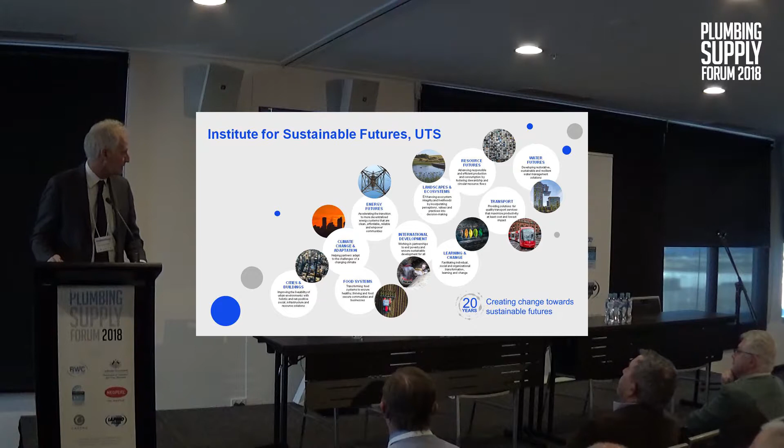Some of those places shown here are jurisdictions we've worked in, obviously in Australia, particularly during the Millennium Drought. We were extremely busy with a whole range of different water efficiency programs, working for government regulators, utilities, and the private sector. But in terms of the presentation, I wanted to just talk first about what is the goal in terms of sustainability.

What are we chasing? How do we know whether we've succeeded in what we're trying to do? Of course, our mission to create change towards sustainable futures is deliberately a direction, not something you can ever reach. It's a nudge, trying to move things in that particular way.

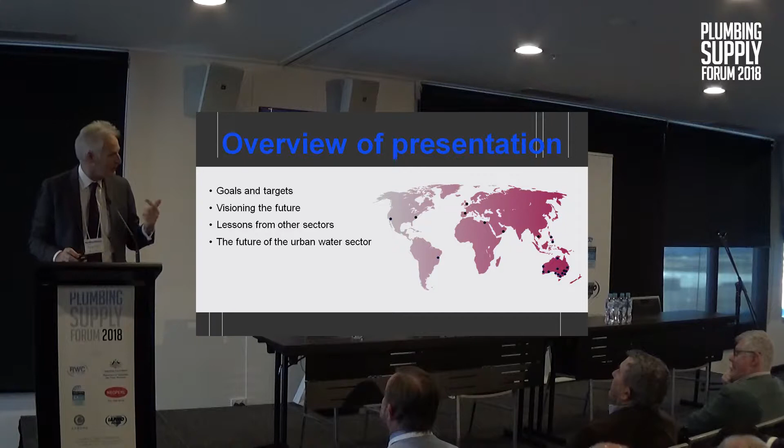Secondly, just talk about, well, how do we vision the future? How do we make sure that we are trying to create a future that we can then work each year by year towards? Then lessons from other sectors, as I said, and also just a bit of crystal ball gazing. Might be dangerous, might be a bit arrogant, might be a bit foolish, but to just cast an eye to what we might be seeing down the pipeline, as it were.

But firstly, there are a few things that have changed in the last few years. One is that 190-something countries have reached an agreement in terms of the Paris Climate Agreement. For all the criticism that particular agreement has generated, it actually is an agreement to move forward to try and have a goal of reducing the impact on global temperature through CO2 emissions. That is determining a whole range of different actions. It's one of those sort of 3 steps forward, 2 steps back cases.

But perhaps I think a quiet achiever is the Sustainable Development Goals. The 17 Sustainable Development Goals replaced the Millennium Development Goals, which had come to the end of their time in 2015. Again, over 150 countries around the world have signed up for these, including Australia. And one of the changes from the Millennium Development Goals is it is seen clearly to apply to high-income countries.

So it's not just about low-income countries, it applies across a much broader range of parameters. You might think 17 goals is too complex, let alone 264 indicators, but it's actually a very strong foundation, and it's being taken seriously not just by governments around the world, but by the private sector as well, and certainly by NGOs. So this is the backdrop in which we're operating.

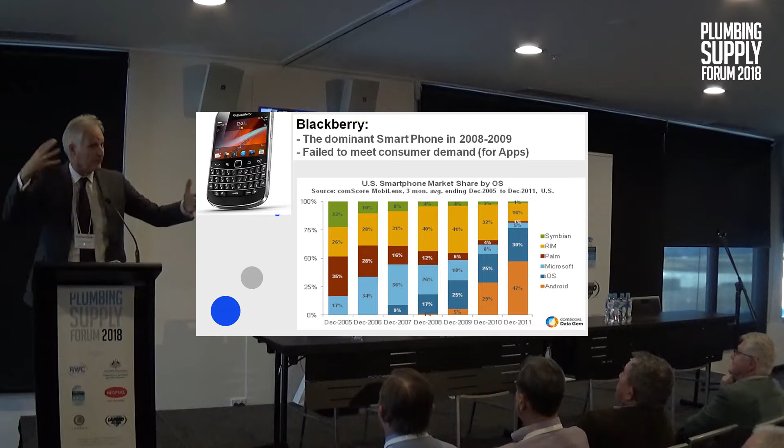We see this in the energy sector too. Let me give you another example. In terms of disruption, hands up those who ever owned a BlackBerry. You see how rapid the change was, with BlackBerry sort of disappearing from the market, because while being a dominant smartphone, it failed to meet consumer demand, which was actually for the applications, the thing which sat on top of the phone infrastructure.

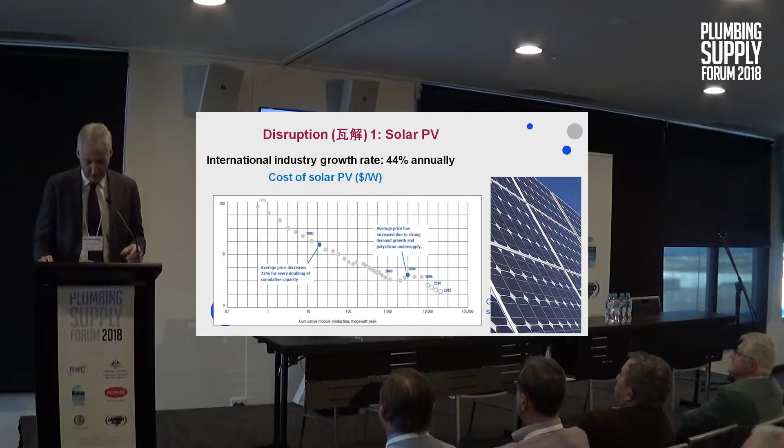We're starting to see, as I was alluding to, the disruption. There are a couple of different disruptions. I'll use these as illustrative points so we can then talk about water. We've seen the rapid decline - this is an old graph, it's gone down even further now - in the cost of solar photovoltaics, which has completely changed the industry.

The second disruption, which we're just seeing the beginning of - in Australia we're a laggard, of course, we don't have a good policy environment, the market's not as good as it is elsewhere such as Norway or China and so on - but we will see very shortly, and this is a prediction I'm comfortable making, a massive change in both sales and therefore ownership of the stock of electric vehicles, including combinations of battery electric vehicles, plug-in hybrids and so on.

It's interesting to consider how many plug-in hybrid electric vehicles would equal Australia's total peak electricity demand. I won't do that as a quiz since we probably don't have time, but it's actually about 800,000 vehicles, or about 6% of the fleet. So it's a very small number of vehicles relative to our fleet which actually have the same generative capacity as our entire peak electricity demand.

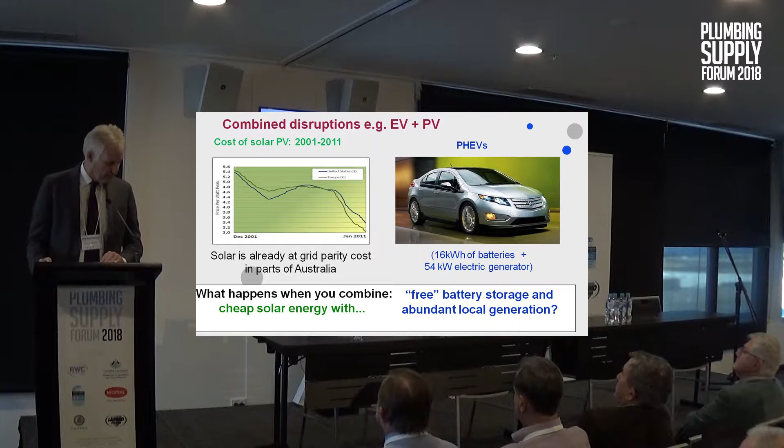The implications of that for the electricity system are significant, both in terms of grid-to-vehicle charging and particularly vehicle-to-grid supply and peak demand. If you combine these two disruptions, we could do this well by making sure charging regimes suited the existence of photovoltaics and a mobile storage system, where the batteries come free with the vehicle - people buy the vehicle for its mobility, and the battery's ability to provide energy into the stationary grid is a free good they can get paid for. Combine those two things and that's a good outcome. If we just have willy-nilly charging without such controls, we'll have a very bad outcome. Combine them properly and you get significant disruption.

Now the next disruption might not seem so high-tech, but in fact it is, and it's extremely important, with profound implications also for the water sector: the ability to empower consumers to have control over their consumption and use. We're starting to see the emergence of this - in the US, the Green Button platform. There are other vendors in the market, and they're starting to come to Australia. A lot of Australian startups are playing in this space. In fact, Australia's a very rich place for startups in this sector, and I think we should look forward to seeing the same innovation ecosystem support in the water sector.

We've seen startups - Solar Analytics, GreenSync, Reposit Power, Watt Watchers, Watt Cost - a whole range of small, medium startups and scale-ups working on how to provide information back to customers about their energy use and what they can do about it, how they can reduce it, including special deals, but also how they can improve energy efficiency and reduce peak demand in particular, and get paid for it.

Now, of course, the analogy isn't perfect with water. Peak demand is an issue in the water supply system, but it's not as great an issue as it is in energy. But the consumption piece - the control for leaks, the asset condition monitoring, the integration with BIM - these are relevant too.

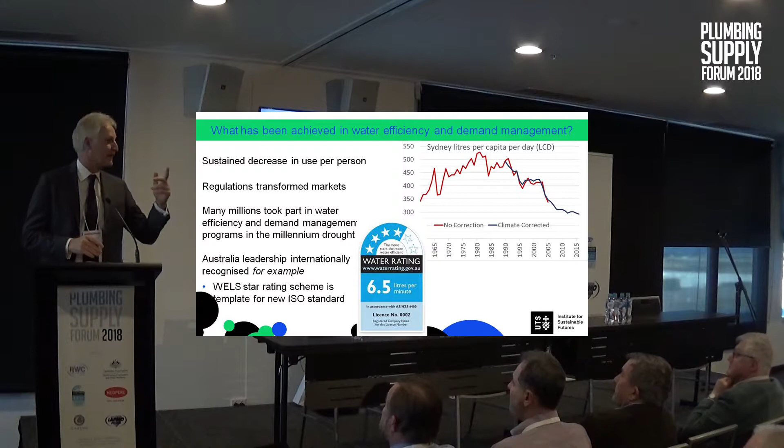On that score, I just wanted to make a quick public service announcement. We've been privileged to be commissioned to provide a review of the WELS scheme in terms of its benefits and impact. Anna Schlunke's in the audience, from the Institute, and she's really keen. We're really keen for any stakeholders to contact us to talk about WELS. Anna is working with others - the project, of course, Carol, on the client side of that project. So apologies for taking time out for that public service announcement, but I think it's quite a timely look to extend some work we did previously reviewing WELS.

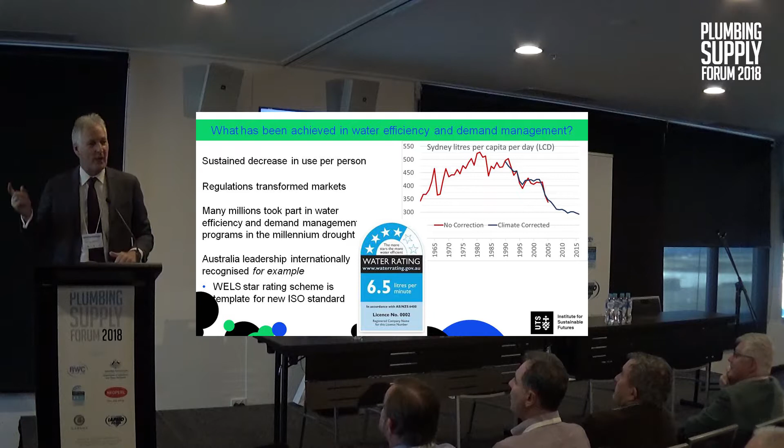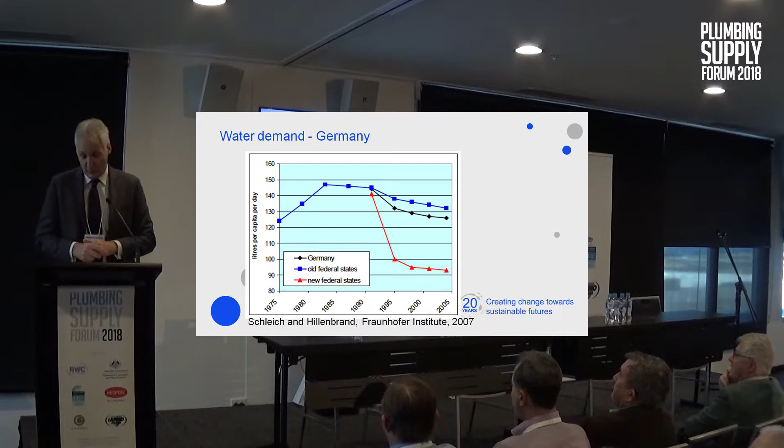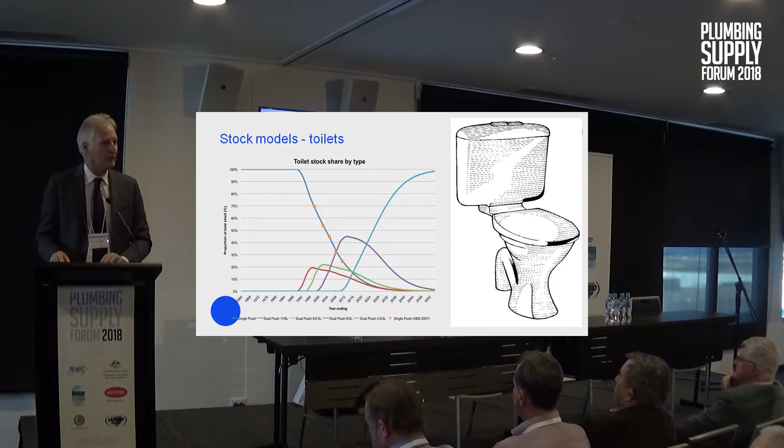And you all know why. I apologise almost for this slide because it's so obvious to all of you in terms of your work, but the change in stock from the introduction of the first dual flush toilets means we will never use as much water flushing toilets as we did around 1992 or so. We reached peak flushing, and we'll never use as much water in toilet flushing again, no matter how much the population grows, because toilet manufacturers don't stop. They keep working on even more efficient models.

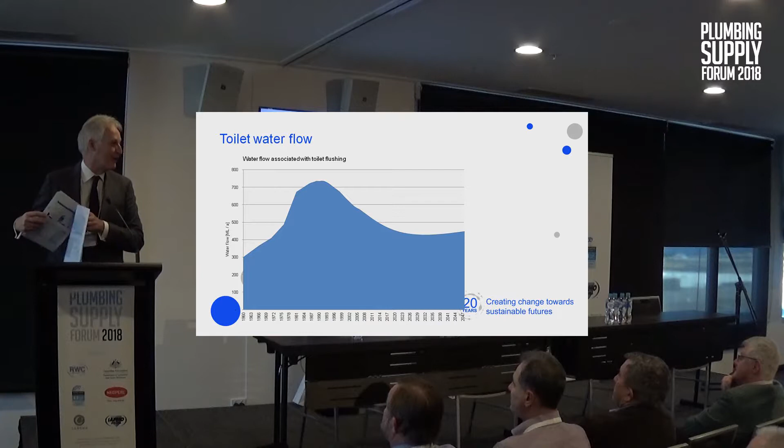And we see this - some of you might have come across this notion of a Kuznets curve, the idea that low-income countries reach a level of affluence, and in doing so increase pollution output, then reach a point where they can afford to spend money on environmental and pollution controls, and come down the other side. Now, there are some serious philosophical objections to this model, and it need not be so, but you can apply the same principle. We've seen this occur across the world, where consumption of water, energy, materials used per capita increases and then reaches a peak, plateaus, and decreases.

We've seen it in oil, we've even seen it in vehicle kilometres travelled in transport. We've certainly seen it in energy, so energy kilowatt hours at least have plateaued and are reducing in the residential sector. And we've certainly seen it in water.

It's quite extreme, actually. And so one of the questions we have for our work, which we do in low-income countries, is whether we can actually just tunnel through this Kuznets curve, not go through all the fuss and bother of installing inefficient equipment and appliances, which then generate more wastewater and cost millions of dollars per megalitre per day, and so on. We could just cut to the chase with an efficient system to start with.

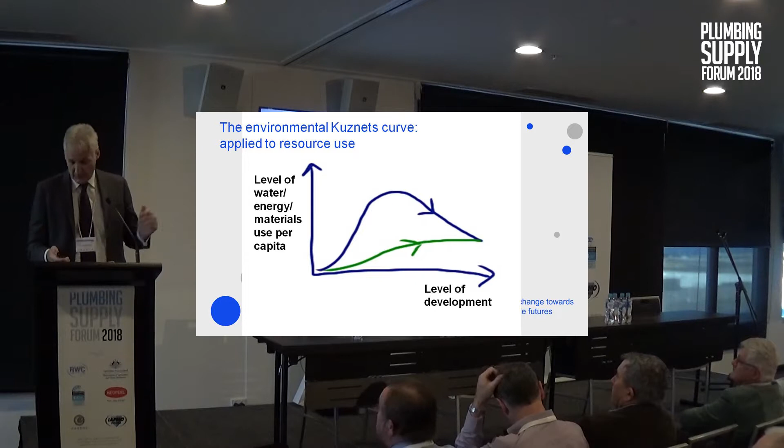And one of the ways we would do that is to think in systems terms, and I'll come back to that very question. Because water efficiency is the single largest, quickest and cheapest contributor to new water, and this is work we did some years ago for Sydney, which showed that 145 gigalitres per year from water savings is the largest single contributor to new water in Sydney. It's the quiet achiever, if you will, or the negalitres, another way of expressing it.

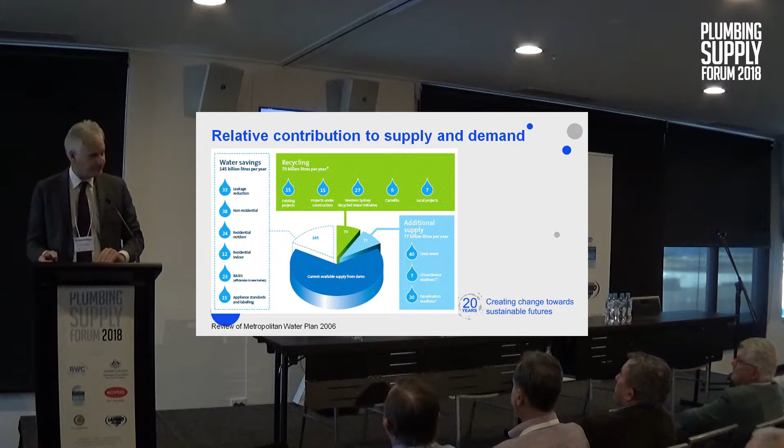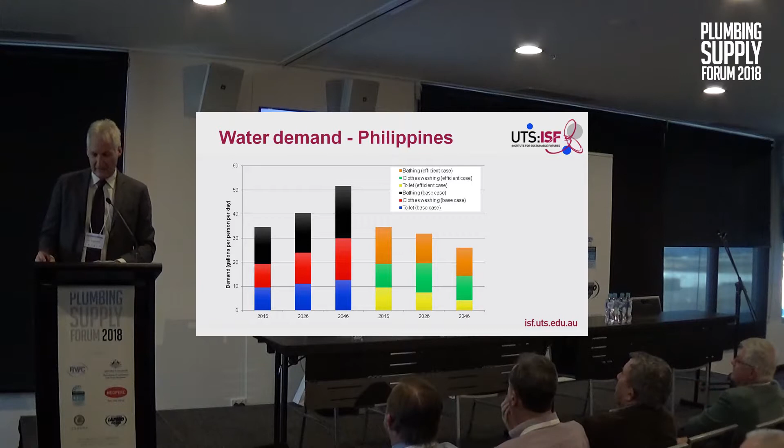Looking at other low-income countries, if we consider a future transition from pour flush latrines, from manual showering, from manual clothes washing, to more efficient methods - and we've observed this in many peri-urban areas around the world - as people do gather fixtures and appliances in their premises, if they're not efficient, we face the worst case outcome, which is the growth you see in the left hand of the three graphs. If we put in efficient, best practice equipment, fixtures and appliances, we see the reverse - we can actually reduce water use over time, even relative to manual use, which is a telling lesson about the importance of these kinds of regulatory standards in low-income countries as well.

So that's enough about water efficiency - or you can never have enough about water efficiency - but for now, let's turn our mind to perhaps the bigger issue, which is the water infrastructure system itself.

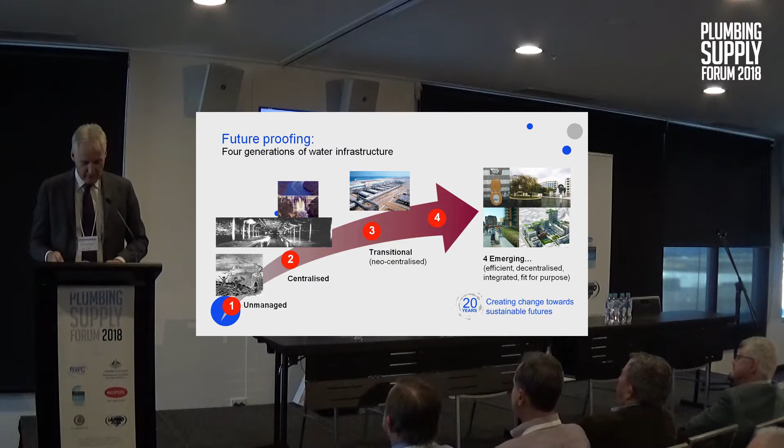We've constructed the human water cycle from three different components: a pressurised water system, which originally was put in place to prevent or help with fire management; a stormwater system, put in place to prevent flooding; and a sanitation system, put in place to prevent cholera and disease. So we started with the first generation, unmanaged and decentralised. Interestingly, these parallel the four sort of industrial periods, and I'll shortly show a chart of the evolution to Industry 4.0 - they're quite analogous, and we've done a similar analysis for water as for the electricity sector, and possibly for others in terms of transport and so on.

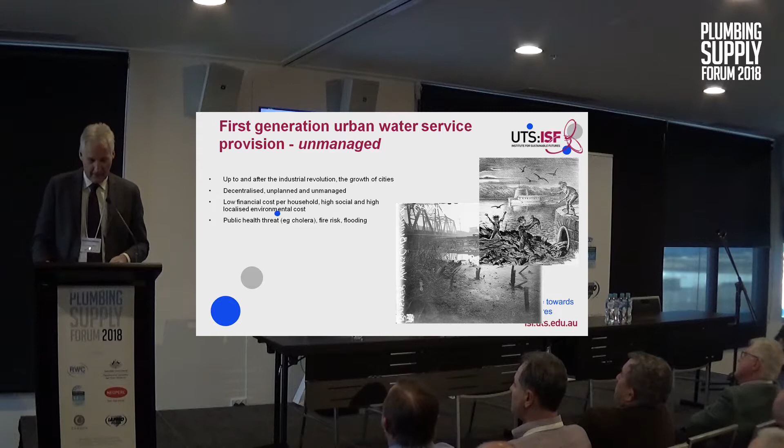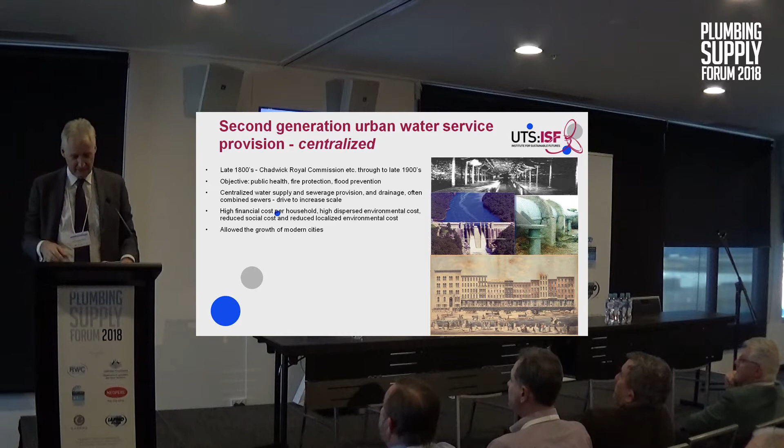So what it did is it protected the health of people in the city, but it pushed the problem away and into the lake. In the case of Chicago, further out into the lake, and in Sydney to Bondi and so on. So we then had the third generation, and this was the environmental protection movement to say, well, this is not good enough, we can't just be pumping raw sewage out even if it's some distance from where people live. Soon people wanted to live there because it was nice to be there, Bondi, and so on.

So we had not in Sydney for a long time, I'll admit, in fact yet, ever, but in other cities we had a move to put end-of-pipe systems in order to improve environmental protection. So we spent a lot of money, obviously, and a lot of energy, a lot of chemical energy, in order to improve that.

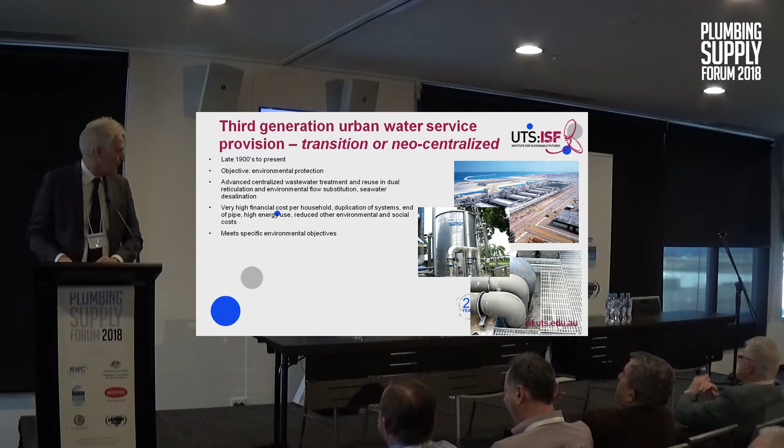So now we're starting to see, and part of this is driven by innovation, part of it's driven by an awareness of the costs associated with that existing system, part of it's driven by community interest and by the development sector, Green Star. There's a whole range of different reasons that come together for what we call this fourth generation, emerging generation of urban water service provision.

So we're seeing advanced water efficiency, source control, starting to recognise that with vacuum toilet systems we could be both reducing the water use but also capturing the carbon and nutrient and other energy value of the waste in a vacuum system, co-mingled with organic waste, food waste, which is now emerging as the significant residual problem in solid waste disposal. So you see a perfect solution there, which we're looking at very closely through a vacuum system.

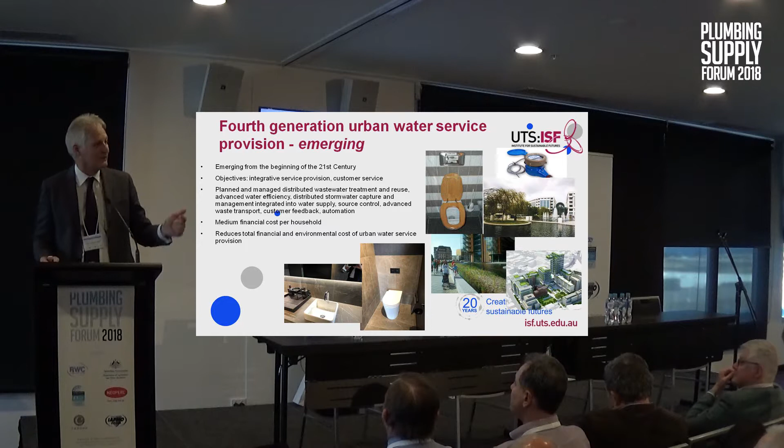So you can sort of see the picture here, and of course I've put a token smart meter up there to point out that the digitalisation of that whole process, including telemetry and controls, is going to be quite significant and important.

Fourth generation in practice, many of you are familiar with Central Park, which is just opposite our campus. We have pride in having the ugliest building in Sydney, the big brown one. Brutalist, the perfect example of brutalist architecture in the 1970s.

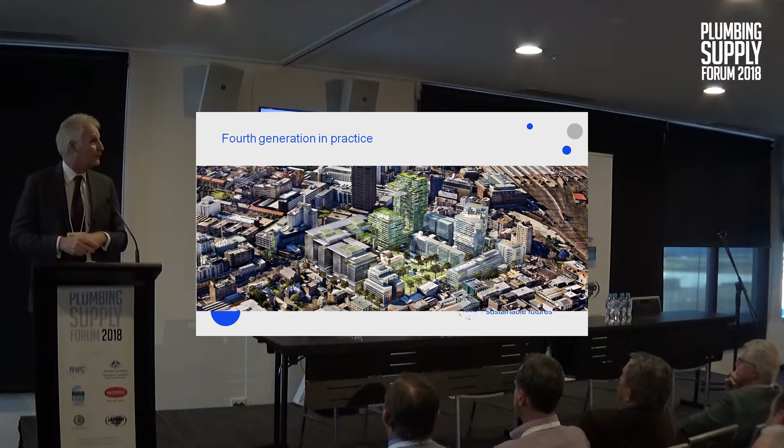And the award-winning so-called best tall building in the world in 2014 is opposite us, which is One Central Park, with the green wall designed by Patrick Blanc. But more significantly is what's hidden: the 1 megalitre per day wastewater treatment plant in the basement, which recovers and reuses wastewater, treats it to a high standard for use both for irrigation but also for toilets, cooling towers, cold water wash, cleaning, and the cooling towers.

So that's an example. It's integrated with the central thermal plant, which provides the heat, and rainwater is collected from the roof as well. So this is an example of fourth generation practice. In fact, there's a 6 megalitre per day sewer running diagonally under the site, so it's not like we needed to do this in order to provide sewer capacity, but it does provide an example of what you could do if there was a sewer constraint, or if we wanted to start to slowly reconfigure the system over a period of 50 to 100 years, which is probably how long it will take to do that.

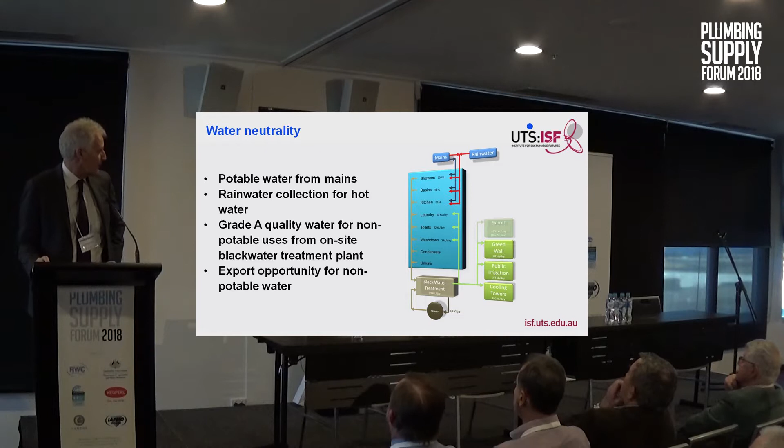With energy, it's much quicker. You can get the grid to operate to your demand. So that's Central Park, and I can certainly commend that to you.

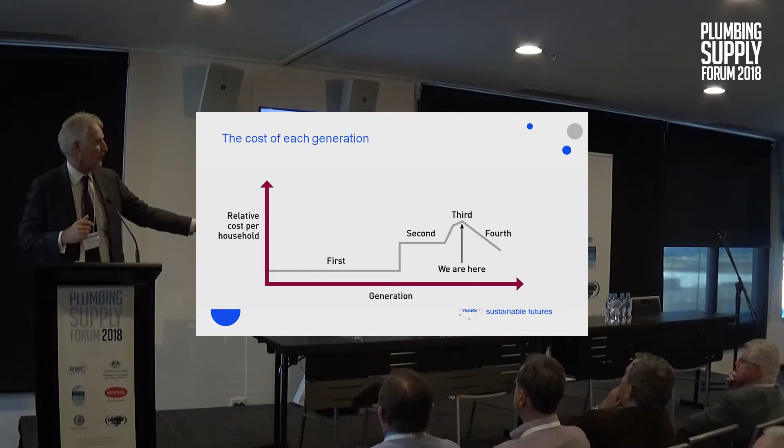There's more information online. So what we're looking at is the potential that this fourth generation is actually a lower relative cost per household. This is an open question, and obviously it depends on the context critically, but it might be that if we can spend less on transport, if we can actually put more smarts, so more brain, less brawn, into the whole water system, we can actually start to reduce the costs from what we've been historically doing. If we threw the variables up in the air and saw where they landed in a much more efficient way, then we would have a different configuration.

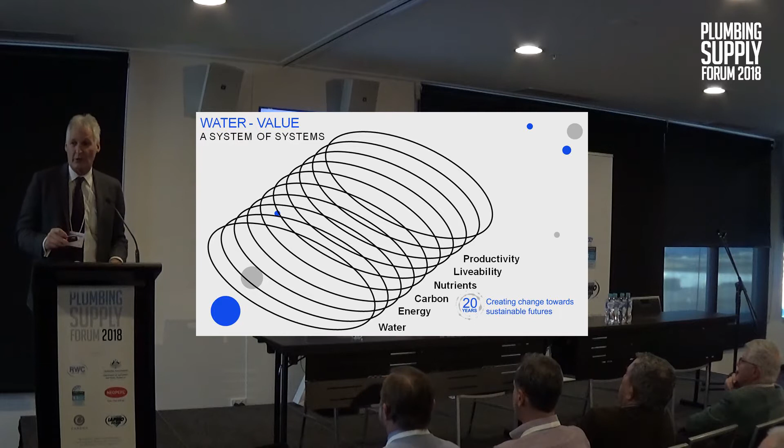And so we heard from John about the 3D and the 4D and the 5D and the 6D. Well, it's an ND system of systems, if you will, where we look at the water, the energy, the carbon, the nutrients, livability and productivity of the system.

And again, from a systems point of view, historically a utility has seen its boundary: we supply water, we do so as a public service at the least cost, and we supply it to the customers, and at the end of the meter, that's where our responsibility ends. But in order to get the best outcome for society as a whole, the utilities need to say, no, our business actually goes beyond that to the customer's premises itself, past the meter, even to the equipment and fixtures - they're part of the system. If we don't consider them part of the system, we'll get the wrong answer, because the answer will be just build another dam or another desal plant, and she'll be right.

Whereas if you actually think, no, well, the appliances are part of this, so let's fix them. And then the practices and processes, how people use those. We realise now that the limits of efficiency of toilets is now no longer governed by the bowl - I think Steve's done the best he can with that. The next step is actually the system itself, the grades, the configuration, the fittings and so on, and even the paper that we use. And the way we use the toilet paper actually makes a material difference. Some of the new wastewater treatment plants that have been installed in different parts of Melbourne, in buildings, have actually got different results in different areas depending on the kind of toilet paper that's used. So, true story. And then, of course, there's the interconnection and feedback that I mentioned.

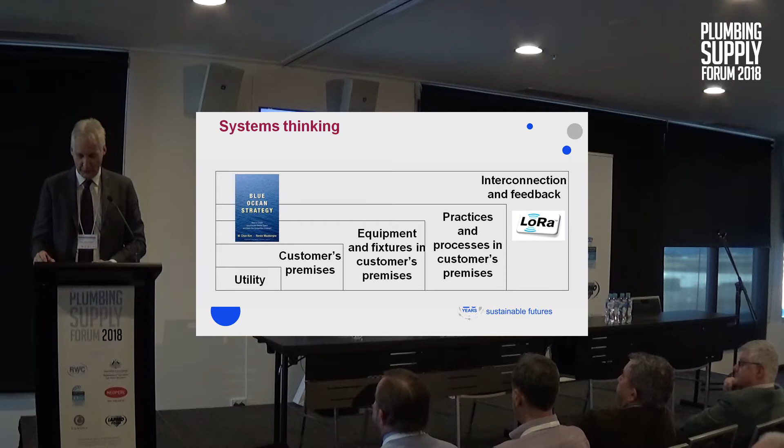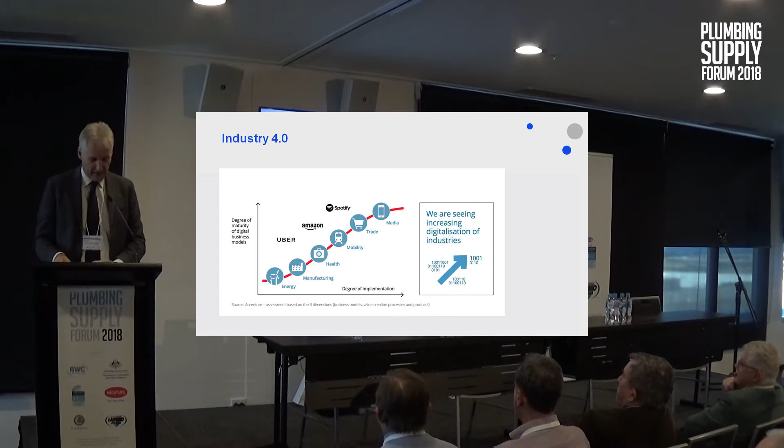So that's another aspect which is summarised here, Industry 4.0. This is from some work from Accenture, but you can see that the water sector is probably just on the bottom left there, coming into this picture, and we will see it very soon, I think, appearing in that particular picture. Getting close to the end here.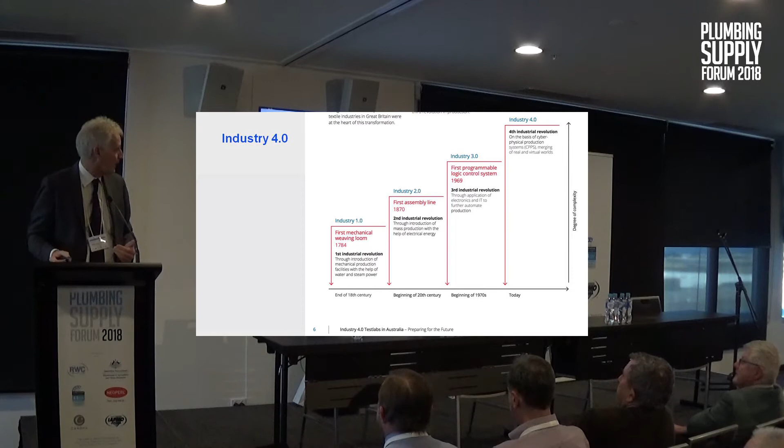So with that, I might leave it, and I think I may have some time for questions. Is that right, Jeff? Yeah, if there's some questions from anyone.

Stuart, last week the Clean Energy Regulator released figures showing that Australia's renewable projects over 100 kilowatt capacity was more than Hazelwood. There's no doubt that renewables are causing significant disruption. Where do you see that disruption occurring in terms of generating baseload power in the next decade?

Very good question, one which is much debated - this is the 'baseload' word. One area our research has led us to is thinking that in the very near future, the whole concept of what is and is not baseload is going to change, or has already changed. One reason is that we have a very strong focus on supply and the fact that renewables, whether wind or PV, or now the first solar thermal station - although that's got storage so it's dispatchable - they're variable, and therefore how will the grid cope with increased variable supply?

Now, when you look at the actual grid system, you see there's just as much variability in the demand, and it can be quite rapid and quite disruptive. In fact, many of the times we've had severe outages has actually been driven by those hot February afternoons. So when you look at it from that point of view and ask what we'd need to do to have the grid provide reliable services if you were to throw the variables up in the air?